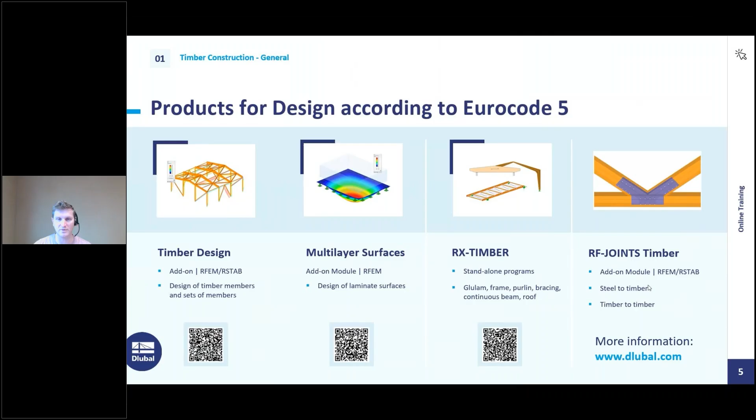We try to implement a new philosophy in RFEM 6, which is not available yet, but we are working on it. Okay, then we can switch over to RFEM 6 and start with our first example.

Okay, a few words about the presentation. I do not recommend modeling directly, but just watching and then repeating what was shown with the recording, which you will receive afterward in an email. This training actually requires the RFEM 6 student training. If you have not seen it yet, you can watch it later on our website. We will not go into the theory of timber design today - that would go beyond the time frame, and I will leave that to your professors.

Okay, then you see the new model base data dialog. That means we will enter a model name, in this case example 1. We choose the type of model. You can select the 3D type for this example or the 2D XZ plane stress type, which would also work. I'm used to keeping it as 3D, so that's why I select 3D.

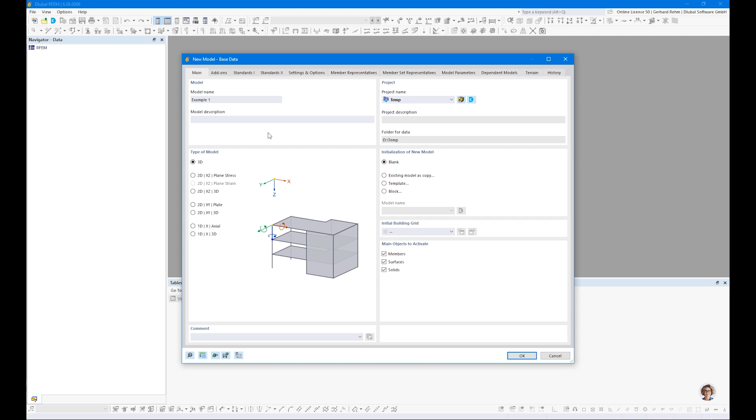Okay, then we go to the add-on tab. Here we can activate the Timber Design add-on. Here on the bottom you will see the Multi-layer Surfaces add-on, which was presented here. Okay, we do not need any load wizard, so I deactivated this option. For wind and snow loads, we don't want to generate it.

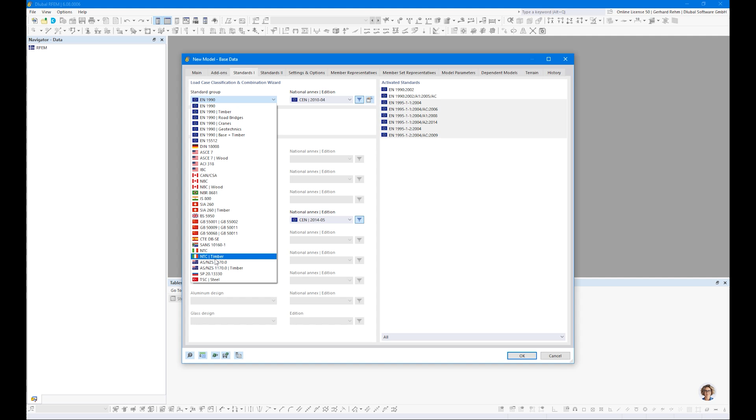Okay, the standard group should be changed to the timber-related standard group in this case, to consider the correct serviceability limit state load combinations. As you know, we talk about load duration classes, so that's why we need to always select the additional timber standard group for European standards or US standard, Canadian standard, Italian standard, Australian standard, exactly.

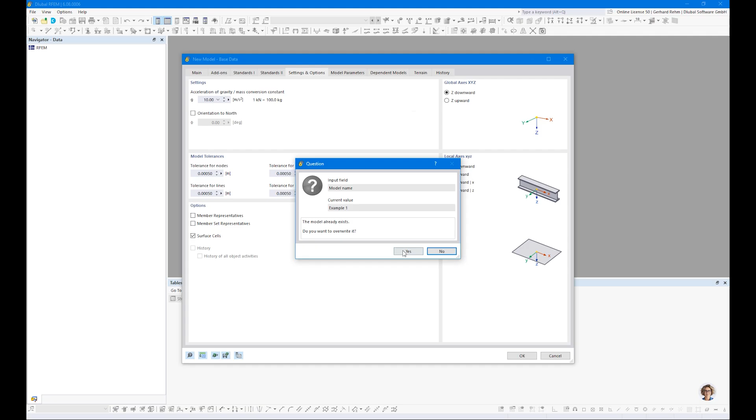Okay, so in this presentation I will use the global Eurocode, that's why I do not select any national annex here. Okay, so maybe we can deactivate the member representatives because we model only a few members, that's why we do not need it. Okay, then let's start.

Okay, so you know about all the navigators and the icons, I guess, from the RFEM 6 student training, that's why I will not mention any further things about that. We start creating a new member. I use this icon here on top.

And each member needs a cross-section, so I will create a new cross-section. Maybe before I start, I will delete out all data to start exactly from scratch. So a new member, and we will load a new section from the library.

All these Massive I sections can be designed according to Eurocode, and also according to SIA and the NTC. The composite sections, Massive II, is in progress, so it's not available yet in RFEM 6, since we introduce a new philosophy to design composite sections, because we do not want to use the gamma method described in Eurocode 5, which is really limited in its usage. We will use a different approach here, and we are working on it.

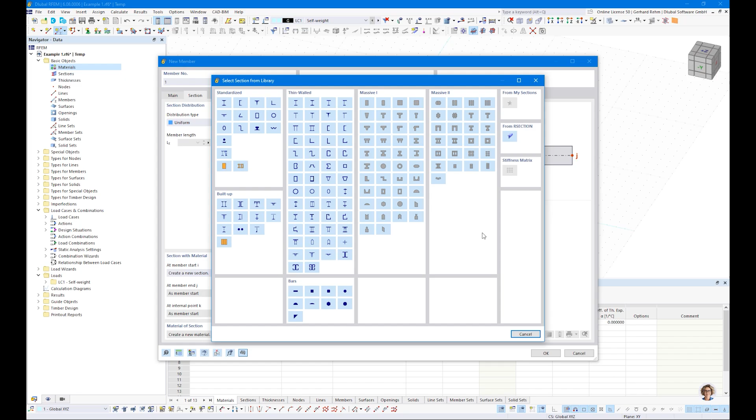So mostly we use our rectangular section. We need a material. We open the material library, and we can use these filters to find the correct material, or we can simply use the search. In this case, I want to use C24 according to European standard. That's why I enter C24 space EN, and I will get directly the material I'm looking for.

Okay, then let's go to the geometry. In this case, the width is 120 millimeters and the height is 200 millimeters. If you're interested, you can also check here the section properties.

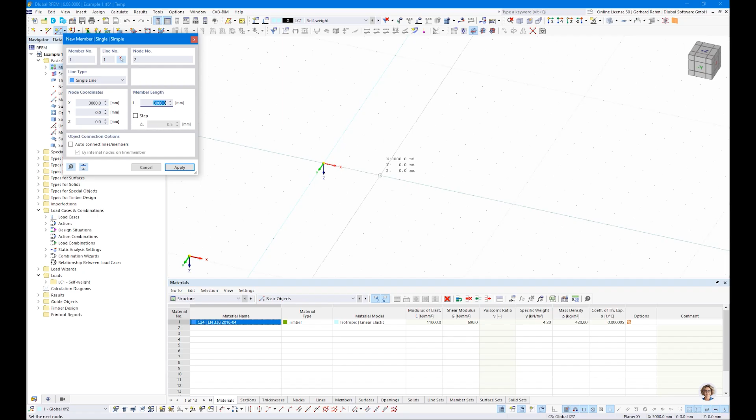Okay, so now the beam is on the cursor. We can start, for example, here in the origin and use these black grid points. I see the unit is still in millimeter. We can change this. So I go to 3 meters, and the next one should be at 4,500 millimeters, so the second span. In this case, we simply enter 4,500 millimeters and click the enter button, and that's it.

Maybe let's switch the units. I've changed it in a previous file, that's why it's set to millimeters. I want to use meters here.

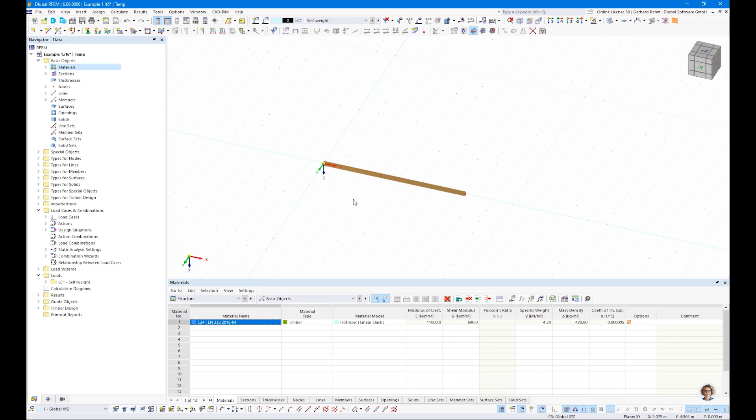Okay, so this is our rendered two-span beam. Of course, if you want to check the wireframe model, simply switch to wireframe. So this is actually what we use for our analysis.

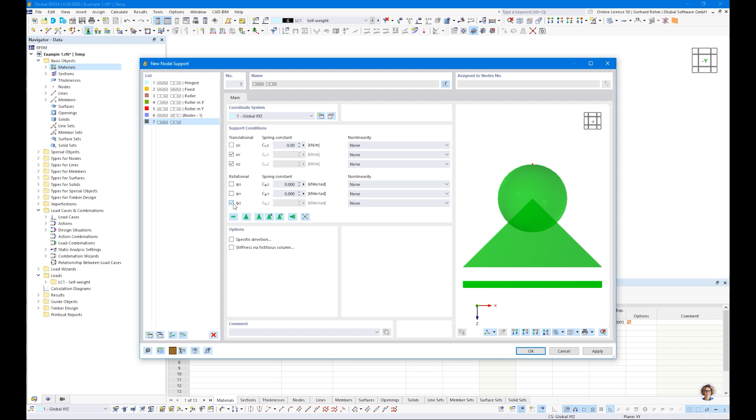So we have this two-span beam here, with the beams. Now we add some supports. We will use a fixed hinge support on the left side, and we will use a sliding support at the intermediate support. I create a new support which is sliding in X, and I will apply them on node number 2 and 3.

Okay, so that's it actually. We have already load case 1, which is created as default. So let's check load case 1. This load case 1 considers automatically the self-weight of the beam with factor 1.0. In case you want to calculate some examples from university, mostly they do not calculate the self-weight separately, they add it into the member load directly. So in this case, you can simply deactivate this checkbox. Here you see directly that this load case 1 self-weight is assigned to the action category permanent, that's why we use a load duration permanent here.

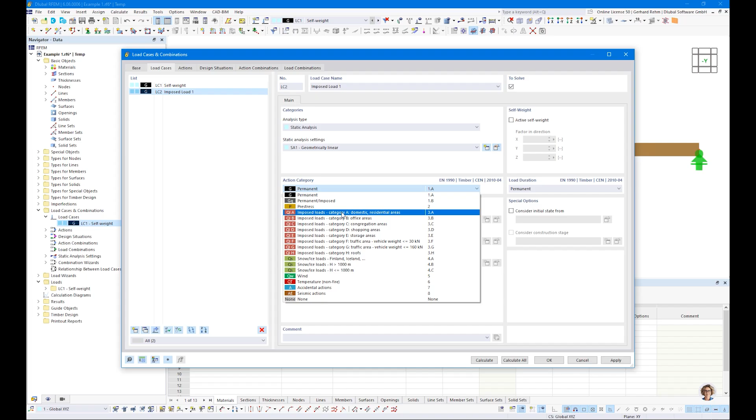Okay, we create another load case. In this case it's imposed load 1 on span 1. Action category we will change to imposed loads category A in this case, and you will see that the load duration is changed accordingly. I will create a copy of this load case and change here from span 1 to span 2. That's only a description, you can use whatever you want.

Then let's fill our load cases with loads. In this example, I will add a new member load. So watch out, do not use the line load for members, this will not work, you need to use the member load. Of course, you can also add some nodal loads too, but for our case we use the member loads. Okay, and we will apply a member load, in this case of 2.5 kilonewton per meter. Hit or click the member 1 and 2 and click OK, and then you will see that the load is created.

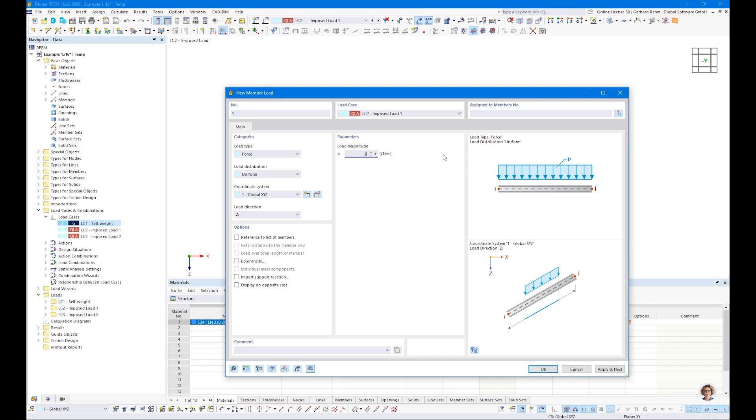Okay, then let's switch over to the imposed load. In this case, we will use 3 kilonewton per meter on the left span, and also in load case 3 on the right span. So we need to check the imposed load separately. We cannot use one load case in this case, because of course the imposed load is a variable load which can act on left, on right, or both at the same time. So for example, the biggest deflection we will receive from load case 3 in this case, but the biggest bending moment we will get from load case 2 and 3.

So when we check our load combinations, maybe we should go to the load cases and combination dialog and go through this dialog first. Okay, so we have created our load cases, then we will see what happens to our actions, especially important here for the imposed loads. When we check it, okay, both load cases can act simultaneously.

In case we switch over to alternatively, both load cases will not be combined. But of course, we want to consider all of them at the same time, meaning simultaneously.

Let's switch over to design situations. Here we can define which design situation we want to check. Of course, we want to check ULS, meaning permanent and transient, and we want to check the characteristic deformation and the quasi-permanent deformation. It depends on the national annex.

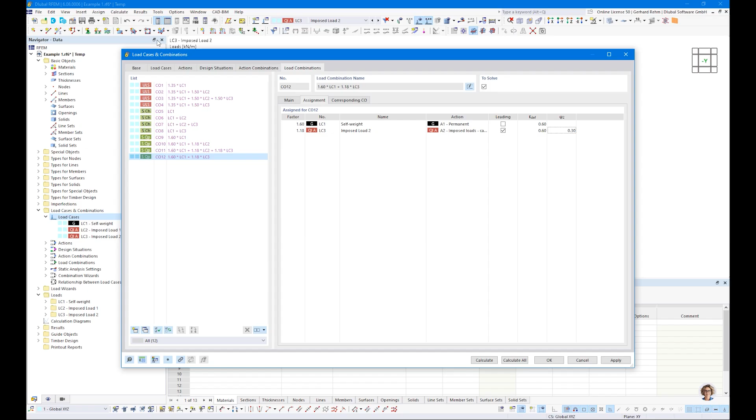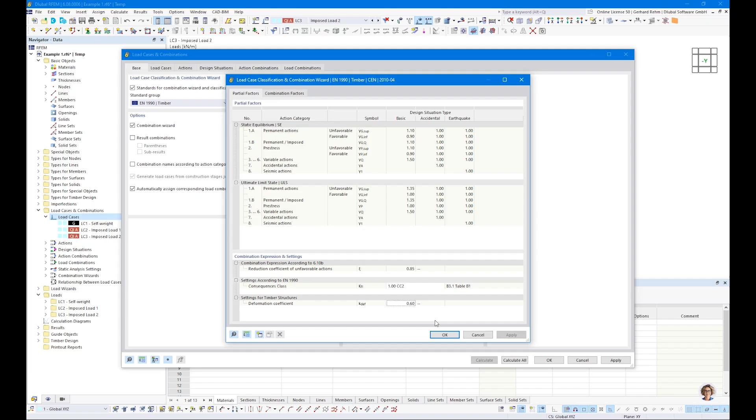The kdef value is described here in this load case classification dialog, and here on the bottom you see which kdef value is used as default, 0.6. This is, I guess, the case for most national annexes for softwood. Of course, if you have different service classes or different kdef values, you can enter or change the values here for this simplified method to consider creep.

So that's it actually so far. What we can do now is calculate the load cases and load combinations. I do that for design situation 1. The design situations include all load combinations as an envelope, so we can check it here.

What we see in the beginning is the deformation, with the maximum and the minimum. That means, of course, the minimum deformation will come from that load only, from CO1. So when we check CO1... no, sorry, I guess it's from CO2 in this case, it's the 9.5 millimeter.

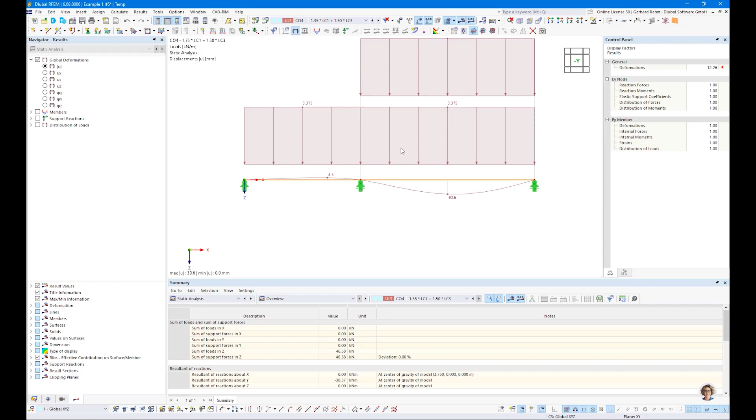And the maximum one should come from load combination 4, I guess. Yes, so load on the right span. Same for the bending moment, internal force My. The maximum bending moment, 15.55 kilonewton meter, will definitely come from load combination 3. And that's the case.

I don't want to go into detail because this was shown at the RFEM 6 training. You receive your deformation, the internal forces, and the support reactions, so I don't want to go into detail for now.

So what we do is focus on timber design today. That's why I switch over to the timber design add-on. Here I can define what I want to check. I will check ULS and both SLS checks, and of course, I want to design both beams.

So the question now is: do we want to design the beams separately, or design it as one beam, one element actually? To do so, we can create a member set. When we go to members, create member set, you see we can combine the different members into a member set.

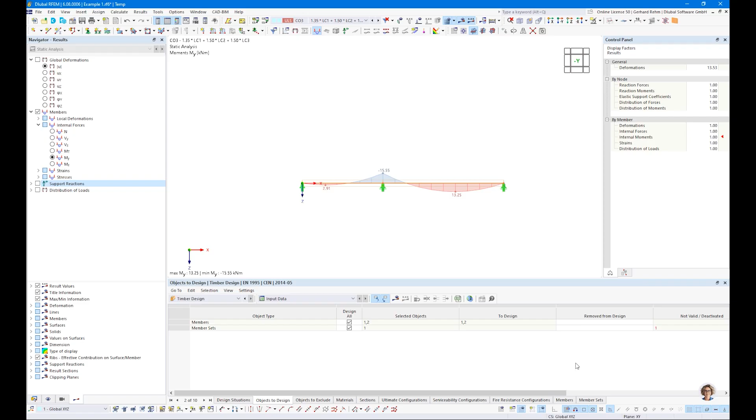That means we do not design 2 members, but we can design 1 member set. I click OK. When we check the member by right-click, member edit, or simply double-click the member, you see the design properties are now on the member, with some additional tabs here because of the design settings. But if we don't want to design any member, we simply create a member set and transfer the design properties to this member set. When we click OK now and go back to the members, you see this member has lost its design property because it's assigned to the member set.

Okay, so let's go back to the member set.

Here we can define some additional settings. For example, we can define which service class should be used, some local section reductions, and effective lengths in this example for buckling. But since floor beams are mostly never forced to fail for stability, we do not check stability for this example. We will check stability in examples 2 and 3.

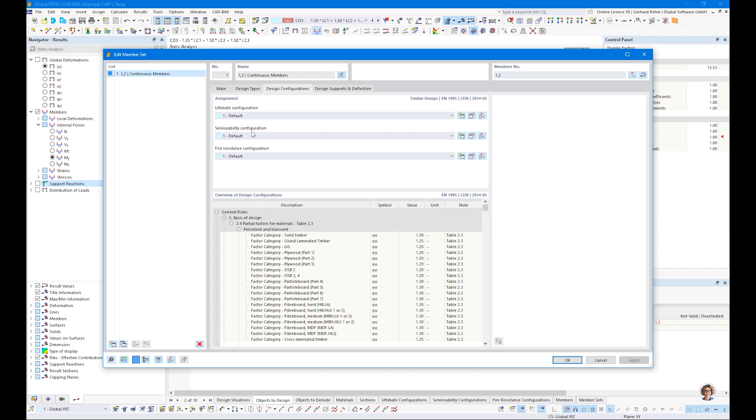Okay, so let's go to the design configurations. Each element, member or member set, has assigned a ULS, an SLS, and a fire config. We focus on ULS and SLS design checks for today. Let's check the default setting for the ULS config.

When we check it, there is, for example, this option, perform stability design, yes or no. In this example, I do not want to get informed that I miss some input for stability, that's why I deactivate this setting. There are some further settings for members and for surfaces, and also some standard parameters which I don't want to mention today in detail.

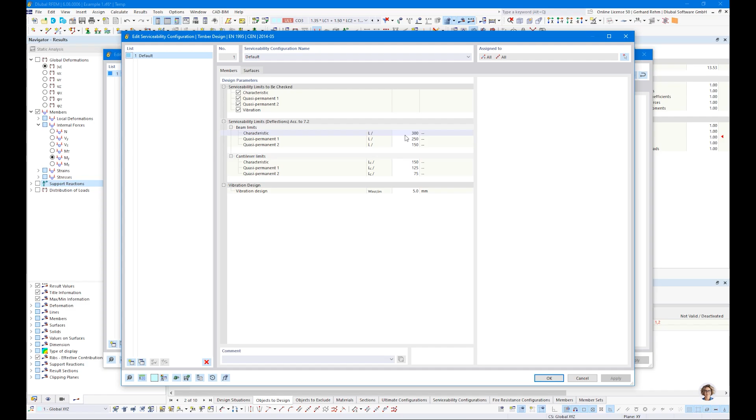When we check the SLS config, we will see our limits from the standard. It's also dependent on the national annex, of course, but it depends on you actually, so you can define your limits manually. Okay, then let's go to the last tab. The last tab is about design supports and deflection.

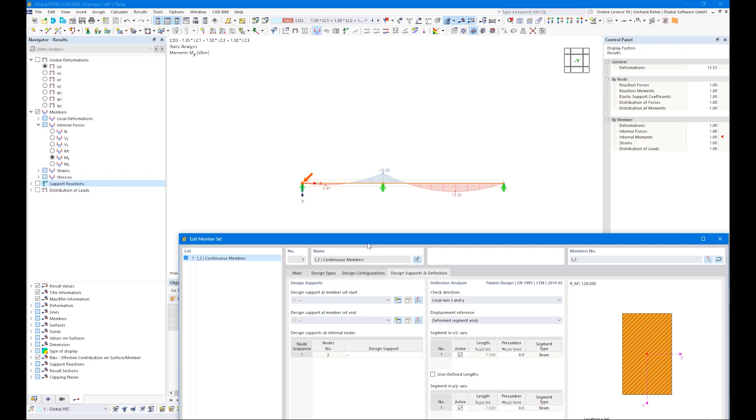Since we do not design the members individually, so member 1 and 2, but the member set, we will see that the reference length for the SLS design is used for 7.50 meters. That means if we left the setting as it is now, the program would check L over 300 by 7.50 meters over 300. This is of course not correct. So what we need is the segment, the first segment, and the second segment.

And how to consider this is by using design supports. This is a design support, so I will create one at member set start. This design support is for the design of pressure perpendicular to the grain, that's option 1, and for option 2, to create the segments for the serviceability design checks. In this case, we want to consider the support in the local Z-axis.

So let's go back and check the local axis system of the member. I right-click the member, local axis system of member. Each member has its own axis system, and in this case, we are focused on the Z-axis.

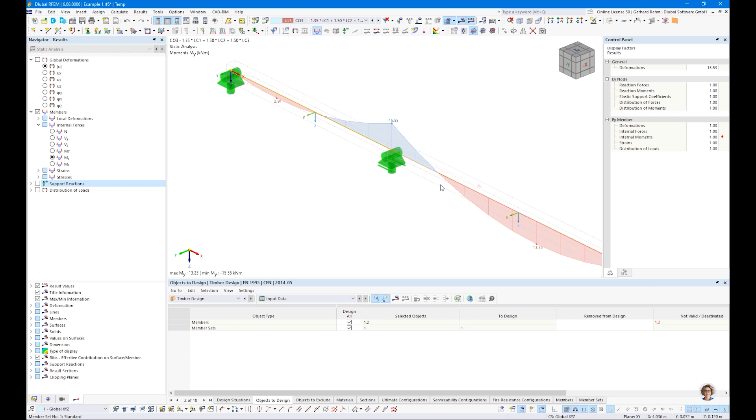Let's go back to this dialog, create a new design support. Support length should be 60 millimeters here. The width should be overtaken from the member, support width in plus Z direction. Of course, we can switch to minus Z direction too, but in this case the Z-axis goes downwards, and we want to apply the support at the bottom side. It's not an inner support, it's a support at the edge.

We could apply some shear force reduction, and we could also apply some reinforcement elements like fully threaded screws. For the compression design perpendicular to the grain, we need to introduce this KC90 factor. For softwood and discrete support, we use this factor 1.5, so this is a user input. We want to consider it for fire design - we don't do any fire design today, but we can leave it on - and yes, we want to consider it for the deflection check.

So I assign this design support to the member start. You will see this icon here on the bottom, or the symbol, and also at member end. You will see the tables are still based on one segment, but now it automatically detects this intermediate node. What we will do is create a new design support here, length should be 140 millimeters, and in this case it's an inner support.

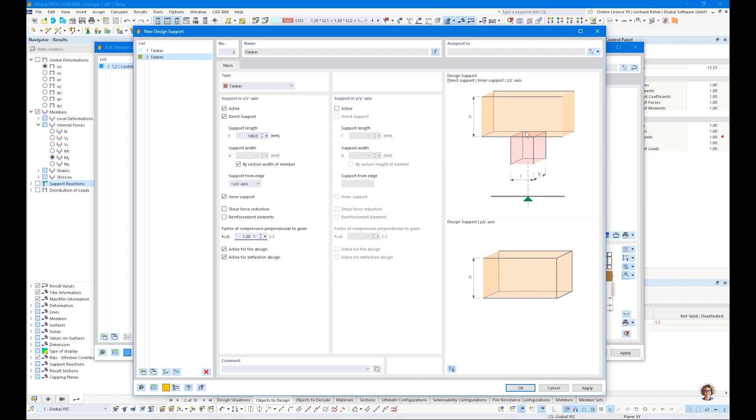This information is important because it needs to know if there is the additional 30 millimeters available for the support pressure design check on both sides or only on one side. Now you see the table has been changed, it detects two spans. One span is 3 meters, the other span 4 meters 50.

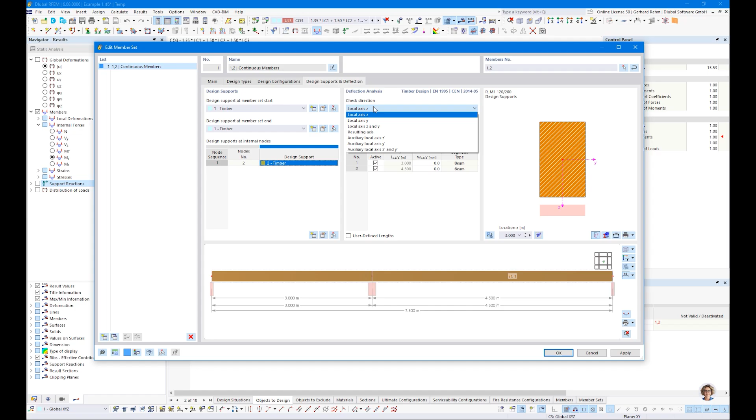We can switch to local Z-axis only because we have no deformation in the Y direction, but we can also leave it for Z and Y - it does not matter. Okay, so that's it for this tab.

Then let's go back to the design here on the bottom, for timber design input data. As you see, member 1 and 2 get invalid because we do not have any design properties on them anymore. That's why we deactivated them, and we want to check only member set 1. Okay, so that's it for the input, and we can simply start the analysis.

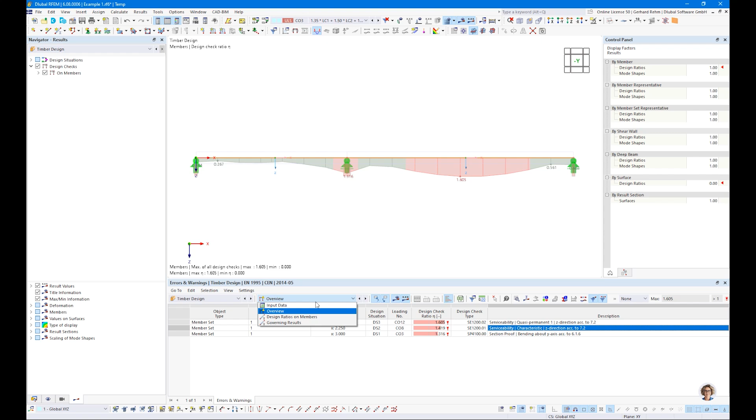So we can switch over to design ratios on members. And here we can see in detail what design checks are not fulfilled. So we have a few 0 values here. We can use this filter to show us everything which is higher than 0.

Okay, so shear is fulfilled. Sorry, not shear. The design of the support means the compression perpendicular to the grain is fulfilled. The shear is fulfilled, so we have no shear issue here, but bending is not fulfilled.

We can check this here in this table, or we can also check it graphically. We have different options. The first option is the default option, ratio envelope, which shows us the ratio envelope of all design values.

But we can also switch to selected design checks. In this case, maybe I want to deactivate serviceability. I want to see only the graphical representation of the ratio for ULS or only for SLS.

So here we can prove the plausibility. Yes, the ratio is affine to the deformation. That's fine so far.

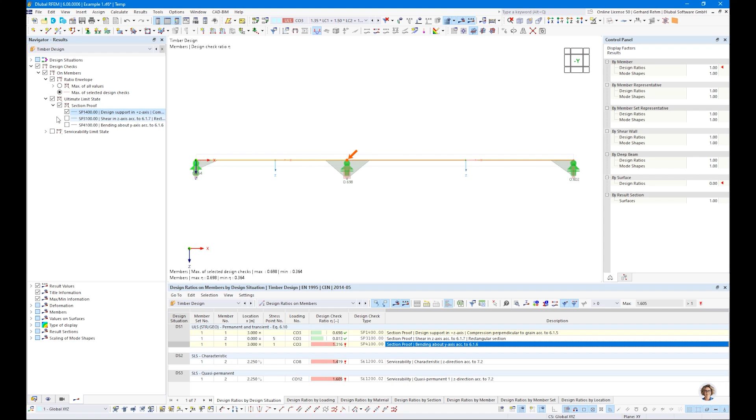Additionally, you can check the results for individual design checks. So for example, here, pure bending, pure shear, or pure design support. This helps you to better evaluate the results.

But let's go back to the table results and to the details. In case you are interested in how the design check is done, you can simply double click this design check and you will see what is done here. It's nothing special since we do not check any stability.

We will check the stability later, and then we will see that all equations are listed here. So we do not have a kind of black box like other software. You see each intermediate value, and you will be able to follow your hand calculations with that.

Okay, so in this case, nothing special. We have our K mod dependent on the load. In this case, it's CO3, which of course has included imposed load and load case 1, dead load. That means the K mod value for medium term is 0.8 multiplied by our 24 Newton per square millimeter, divided by the partial safety factor, and you will get the allowable stress. The stress divided by the allowable stress gives you the ratio.

That's actually all. But of course, what we can do now is we want to optimize this situation. There are two options to optimize it. You can simply add and change your cross section or your material manually here, or you can also optimize it.

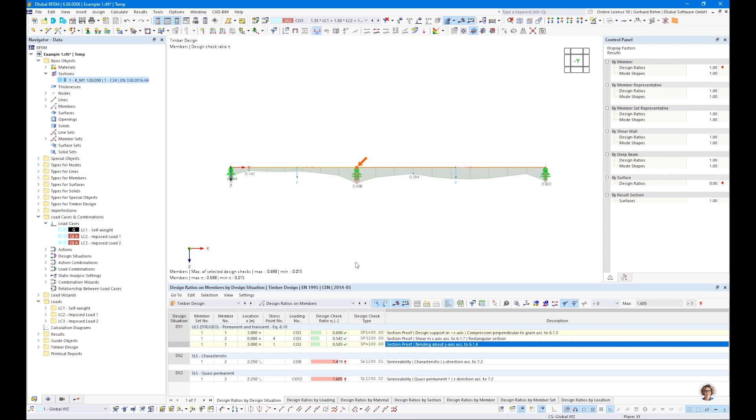Okay, so I'm wondering why we cannot use 120 by 280. It should also work. So I'm confused why it is not working. Let's do it manually and double check again.

Strange, it works with 280 as well. Let's try it again, maybe I have overseen something. Sorry for that. So we will optimize the height. We will start with 200 millimeter and go to 300 millimeter in steps of 20 millimeters.

So we have all the sections available for optimization. Now let's recalculate. Sorry, that was my problem. We need to calculate the timber design add-on again. Sorry for that, small mistake.

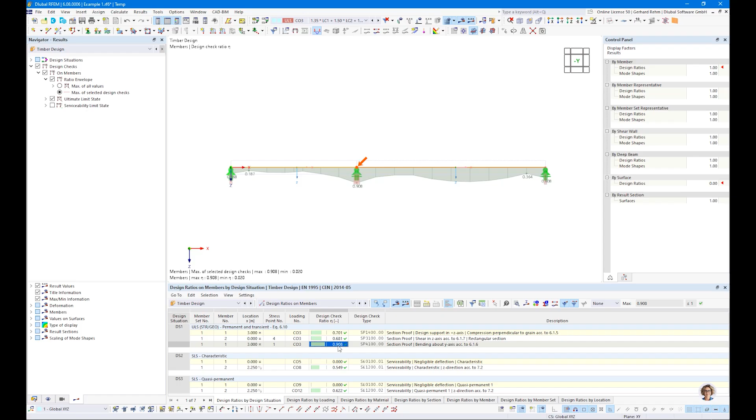Okay, now we see the maximum ratio is 0.9, and when we check the design ratio, when we check the input data again, then we will see 120 by 240 is used. Yeah, so that's fine, it works as expected.

Sorry, I forgot to calculate the results again. Yeah, when we add the serviceability design check, we have - sorry, this one was 200 millimeters default. Sorry again. All right, calculate timber design again.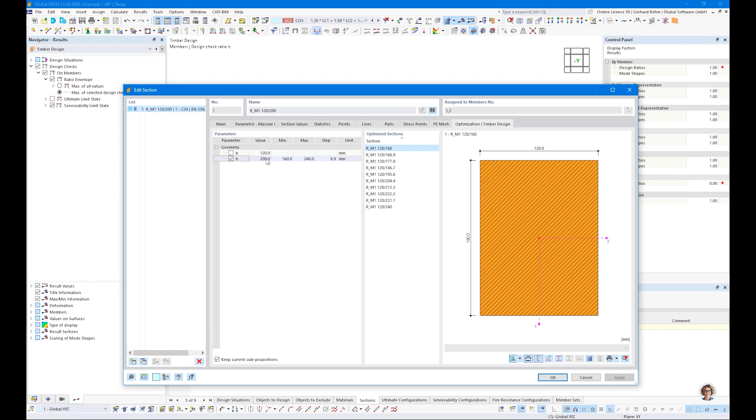Okay, so now we get the same result as before. We will see, okay, bending design check is not fulfilled. We can go back to input data and say, okay, optimize from current row, optimize the height. We start by 200 and the maximum should be 300 in 20 millimeter steps.

So that's it. Click OK, and then we can calculate the result again. Now we see that the design ratio is now fulfilled for ULS, but not for SLS. So what we need to do is we need to override this section. Simple right click, use all optimized sections in model. Then we will see the section will be overwritten, and when we check it again, then we will see the real deformation with the real cross section. So this process has to be done manually.

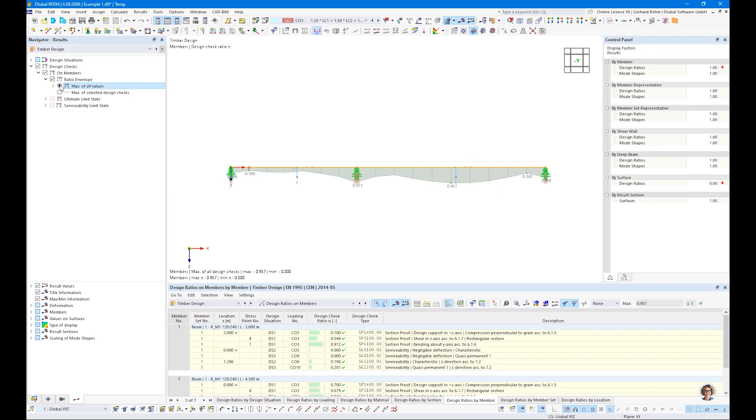Okay, so let's check max of all design checks. Perfect. Now we have optimized it to 95% ratio, which is fine. Okay, so this is our first example.

Let's switch back to our PowerPoint slides, and we will continue with our second example, the flexural buckling.

Okay, I will create a new file here. So in this case, model name is example 2. And add-ons, we will activate again the timber design add-on. We leave the standard, and we can deactivate the member representatives. Okay, I will not go in detail like in the first example.

So I will skip a few things, and I will not mention all settings what I will do. Or I will not describe in detail every setting what I will do. Okay, so let's switch again, standard group timber.

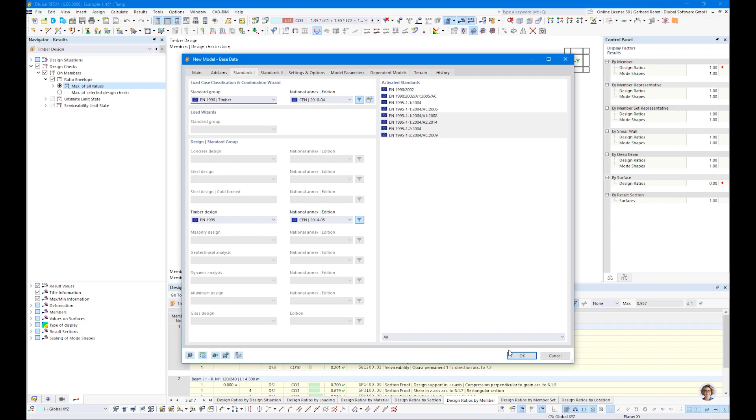And now we talk about buckling design. So that means when we consider or when we use a column, of course, this column normally becomes high normal force. And it can happen that it will happen that not the stress on the member is design giving or controlling, but this column can buckle out of the plane. Depends on the weak or strong axis, of course.

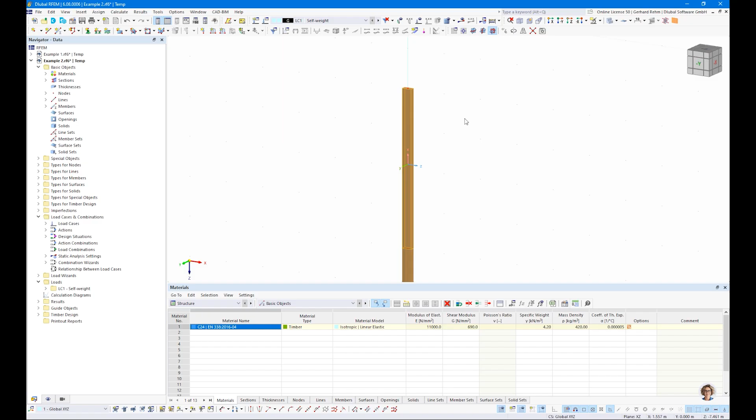So for this example, we will use a column with a length of 8 meters. Section 120 by 240, this is fine so far. So the length is 4 meters and 4 meters. We will have the weak axis, which is about Z axis, and the strong axis, which is about Y axis.

And about Y axis, about the strong axis, we will have no restraint considered, and about Z axis, we will have considered a restraint here in Y direction.

Okay, so we need some supports on the bottom. Oops, sorry. On the bottom. And a support on top, on column head. So we should consider the support like this, so that the normal force or the force can go into the beam.

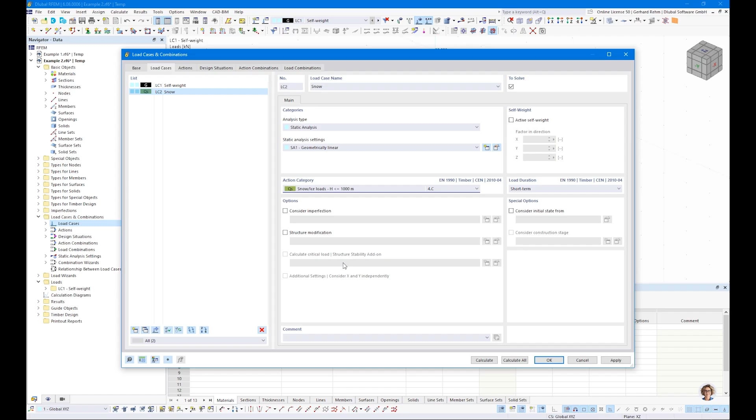Okay, here we go. So we will define some nodal load. I use the nodal load here, 35 kilonewton dead load. Okay, and let's create a new load case for snow load. Snow, and we will switch over to this category, smaller than 1000 meters, for example. It detects short term as load duration.

And when we check our load combinations, okay, let's go back to design situations. We do not want to check serviceability in this case, since we have only gravity loads. We consider only ULS. That means, dead load and dead load plus snow, according to, in this case, first order analysis is okay, since we do only an equivalent member design.

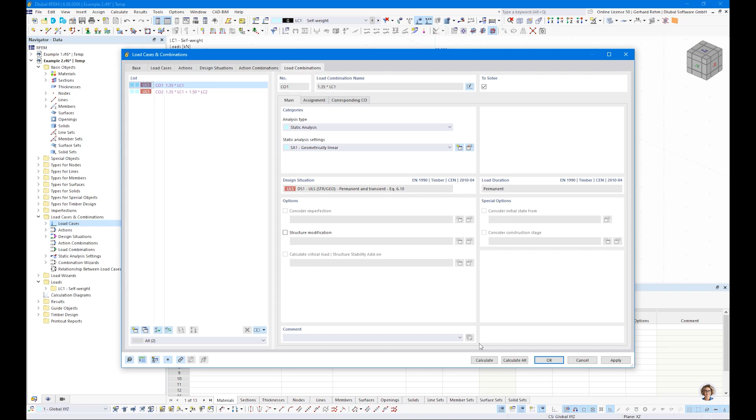So the Eurocode 5, for example, describes two methods, so the equivalent member design and an approach with second order analysis and imperfections, but we will not do this approach today. We focus on the equivalent member design.

Okay, that's actually it. We will fill load case 2 snow load, and we will apply 20 kilonewton of snow load here on top. I guess I don't have to say anything about the results. It's clear. When we check our design situation, we will get the envelope of load combination 1 and load combination 2.

So we are interested, of course, in the normal force. You see the top and bottom value differs a bit because of the self-weight of the beam.

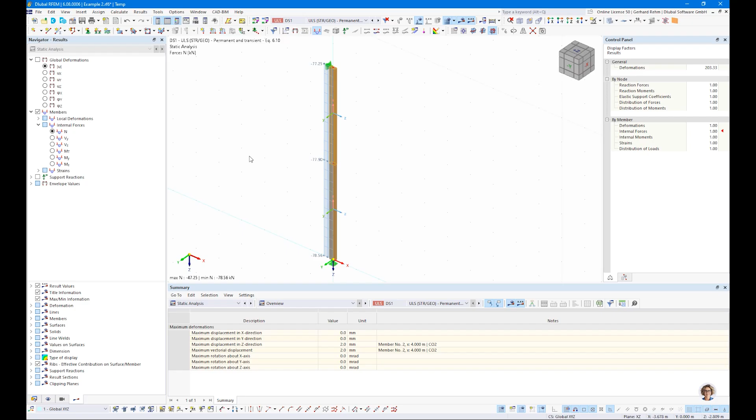So when we go to timber design now and click the calculate button, you will get informed that no effective lengths are assigned, and the stability design could not be performed. This is just a warning message. If you are fine with that, because you know this beam will not fail for buckling, then you can ignore it. But in our case, it's clear this slender beam will definitely buckle out of plane, so we need to consider this fact.

So when we check the results, we get only one design check, which is a pure section proof, meaning force divided by area divided by our strength. That's all, nothing special.

Okay, so what we want to do is a stability design check according to the equivalent member method. In this case, again, we will create a member set of two members and overtake the design properties again.

And here we define design types. In this case, we need effective lengths. In this tab, we say we want to check flexural buckling about the Y and Z axis. Lateral torsional buckling is not an issue here - that will be in example number 3.

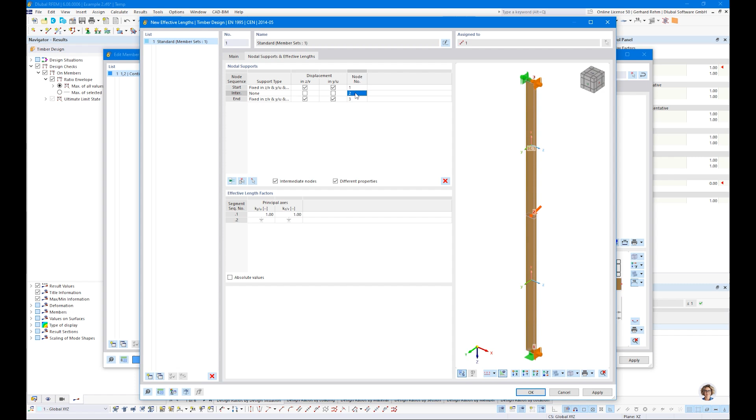So activate this checkbox and pick this member set, or simply insert this row. Node 2 is detected automatically, and yes, I have a restraint in Y direction. You see now these brown colored supports - they represent our restraints.

As you can see, for buckling about Y we still have one segment, and for buckling about Z axis we have 2 segments. Here you can see buckling length for the Y axis is 8 meters and for the Z axis is 2 times 4 meters. This is a simplification, on the safe side. In reality, the buckling length is a bit smaller since the turning points are next to the support somehow, but for practical usage this is fine and common in practice.

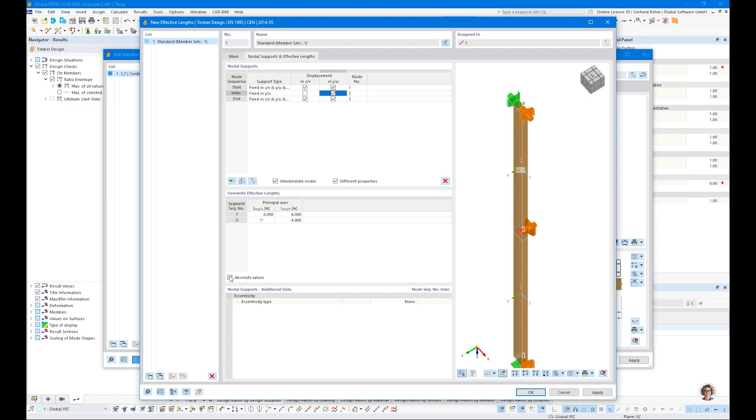Okay, so that's it, we can click OK and OK again. We can also activate this design support in RFEM directly, so we can check them here. Maybe it's worth deactivating the real nodal supports, so you see directly which effective length factor or length is used for the V, Y, or U axis. It helps you see how you have to find your bracing or lateral restraints.

Okay, so that's actually it. We can start the analysis again, and we will get this warning message again because I did not deactivate the members. I can ignore it, but I want to do it properly, that's why I deactivated. And then we'll see we get this cross-section design check.

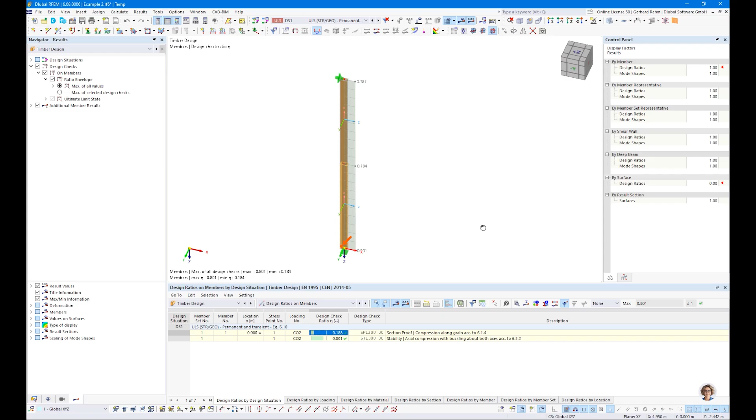And additionally, we get this buckling design check. So let's double check this buckling design check, because now we see all these equations from the standard. So first we start with the slenderness.

Based on the slenderness, we will get the ratio for the relative slenderness. And with the slenderness, according to the Eurocode, considering imperfections, we calculate this reduction factor Kc. So it's actually nothing else than reducing the cross-section section-proof design check by this Kc factor, in this case 0.23. That means when I multiply this ratio 0.801 by 0.23, I get exactly this ratio of 18% or 19%.

Okay, so you're able to follow each intermediate value, so you can compare it with the hand calculation. That should help a lot in proving the results. Okay, yeah, that's actually it for the buckling design check.

We can switch over to the next small example.

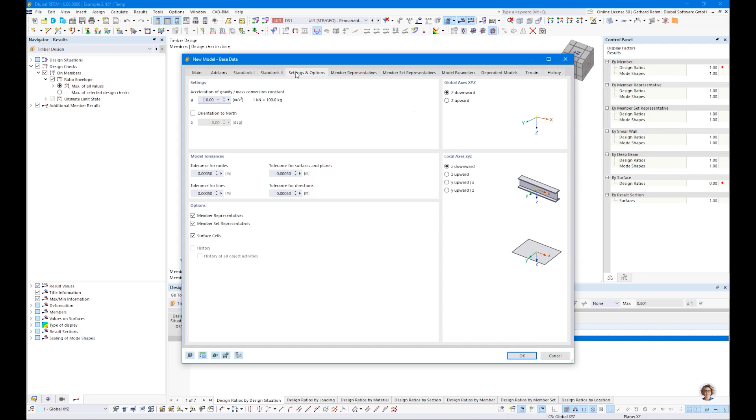Okay, new file, example 3. Timber standard - we do not need any representatives. Okay.

We start with a new cross-section, in this case 160 millimeters by 1600 millimeters. Of course, we cannot make this high beam with C24. We need to change the material to GL24h, for example, to a glulam material. Okay, that's it.

So the beam length should be 18 meters, like this. And we will have a fixed support on the left side, and then a sliding support on the right side. Of course, we could also use the fixed one here because we do not have any axial loads, so therefore it does not matter. We have no normal force here.

With the slider here, we can increase the size of the supports. We will check everything with that load, so we will not add any further load cases, since when you do timber design, the ratio is always dependent on the load duration class. In case of high self-weight and, for example, low snow, then snow is not controlling, but pure self-weight.

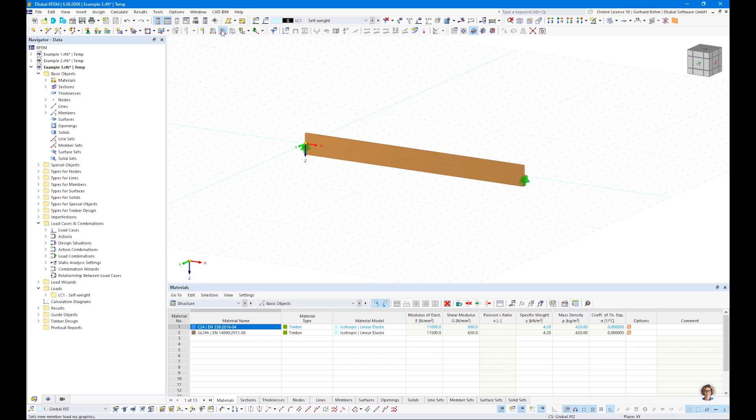So I will add a load here. For example, let's start with 8 kilonewton per meter on this girder, and let's see what's happening.

Of course, when we run the analysis now, we will get this warning message: you have not defined any effective lengths, so stability is not checked. And of course we want to check stability. When we check ULS and SLS, you will see the ULS design check, section proof is 63%. So actually it's good, but we need to know what is happening with this upper chord in this example. That's why we need to define an effective length here.

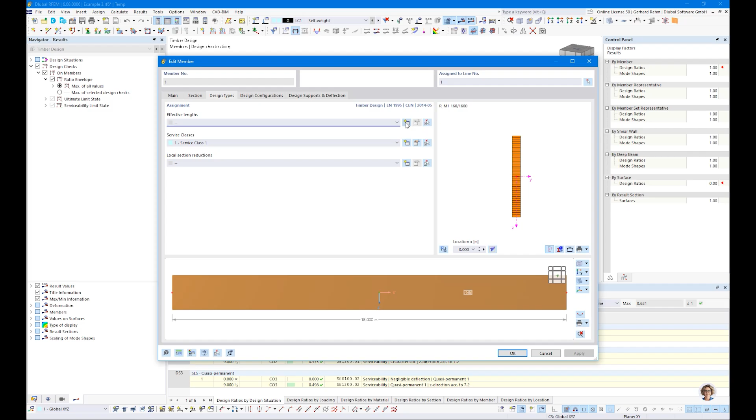We do not check flexural buckling - that's why I deactivated it. Since we have no normal force, you can also leave it activated. Here I want to check lateral torsional buckling. We have three options to check it, because for lateral torsional buckling we need to know what is the critical moment or the critical stress. Based on this critical stress, we can check the equivalent member method.

Let's start with the analytical equation to determine the critical bending moment or the critical stress. This comes from Eurocode chapter 6.3.3. But additionally, we have some eigenvalue solver included, which I will show you afterward, which helps you consider more options instead of settings described in the Eurocode, which is really limited to uniform loads, simple one-span beams, and so on. This eigenvalue solver helps you by not using these tables from Eurocode 5, and instead considers it in a common way to determine the critical bending moment.

In this case, we start with the analytical method. For the analytical method, we need to consider a buckling length factor according to Eurocode 5. We have this table in chapter 6.3.3. We have uniformly distributed load, that's why I select factor 0.9. So that means we have a buckling length of 18 meters multiplied by 0.9, equals 16.2 meters. Okay, that's it.

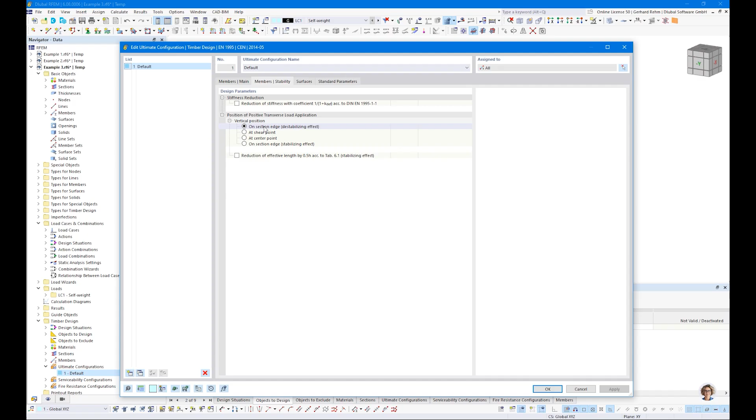Let's go to the ULS settings and to member stability. Here we can double check where we have applied the load. In this case, the load is applied on the top flange, on the top side, because of course it has an effect when the load is acting on the top side - it is more critical than when the load is applied on the shear center or maybe on the bottom side. In the equivalent member design method, we simply modify the buckling length with 2 times h, which is described in this table in chapter 6.3.3 in the Eurocode.

All right, we can start the calculation. And of course, you will see - maybe I will deactivate SLS, I'm not interested in SLS, that's why I delete this checks - and focus on ULS only.

And you see, okay, the design check is not fulfilled anymore. Let's double check the design check. So we see, okay, this is our allowable strength, and we see this equation which comes from the Eurocode to determine the critical stress. We have some factors here, some stiffness, the 5% quantile values for E modulus and shear modulus, torsional constant, and the buckling length.

So we have 18 meters beam length multiplied by 0.9, which was 16.2, plus, since the load is applied on the top side, plus 2 times 1.6 meters, equals 19.4 meters. We calculate again the slenderness, and due to the approach of the Eurocode, we will get this reduction factor. So we modify, or we multiply, our stress design check - in this case the 63 - we multiply by 0.24.

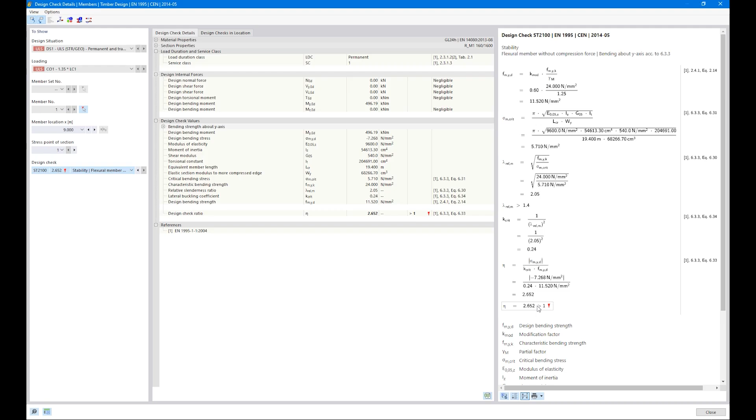In this case, we need to divide it. 0.63 divided by 0.24 equals 2.65. Yeah, and this is exactly what we get. So that means without any restraint, we will not get a fulfilled design check. And in this example, of course, you mostly never have an 18-meter long beam with no restraint. Normally there's some bracing here at the other sides and some beams added to this beam which support it. Yeah, and this effect we want to consider.

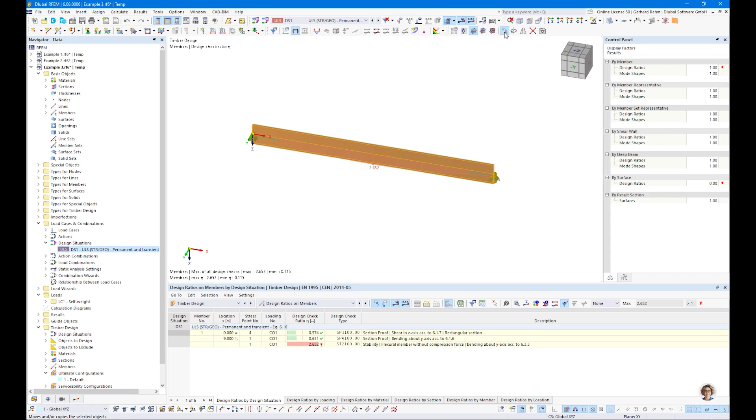Maybe we will do the same first with the eigenvalue solver. I can maybe directly create a copy, including the load. And for this beam, I will switch over to the eigenvalue solver. I create a new effective length where I check LTB by using the eigenvalue solver.

Okay, so now we have two beams. One beam is checked with the analytical approach. The second one is considered by the eigenvalue approach. Okay, let's check the results.

They should be quite similar, should not differ so much. So in this case, we have 2.46 compared to 2.65. The result is the effective length here, which was considered on the safe side. So normally the buckling length is a bit smaller, but Eurocode 5 uses simplifications. It's not exactly factor 0.9, but in reality it should be factor 0.885, for example. And also adding 2 times the beam height is not perfectly correct. That's why we have a different approach.

If you would use the German approach from the German annex, you would get a smaller buckling length, and then this one should be nearly, or should be the same.

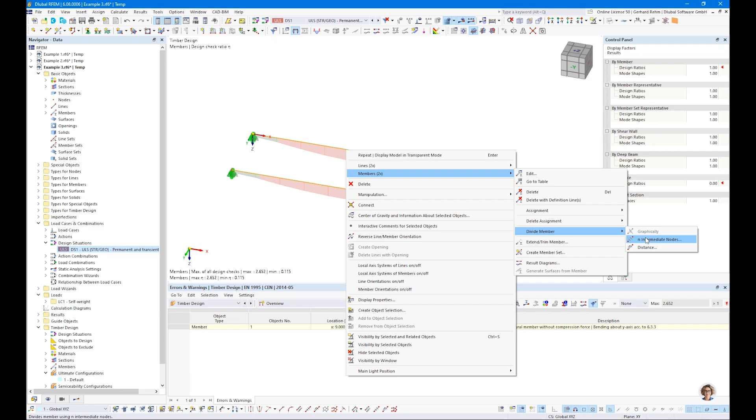Okay, we should solve the problem. And what I do is we will add some restraints here for the buckling method. So let's do it. For both cases, we divide the members and add some intermediate nodes. I will add 2 intermediate nodes, but I will not divide the member. I create a member on nodes. That's also possible, I do not have to always divide the members.

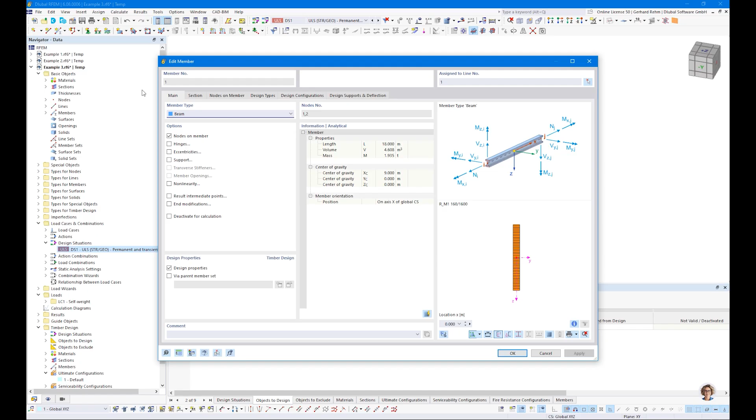So I have this node on members. When we double check it, it's not a standard node, but a node on member. And what I will do is I will modify the buckling length. So in this case, we want to consider intermediate nodes, restrained in Y direction, and all elements can be considered now with factor 1, since we have nearly a constant moment distribution in between the center of the beam. So that's why I use 1.0 here.

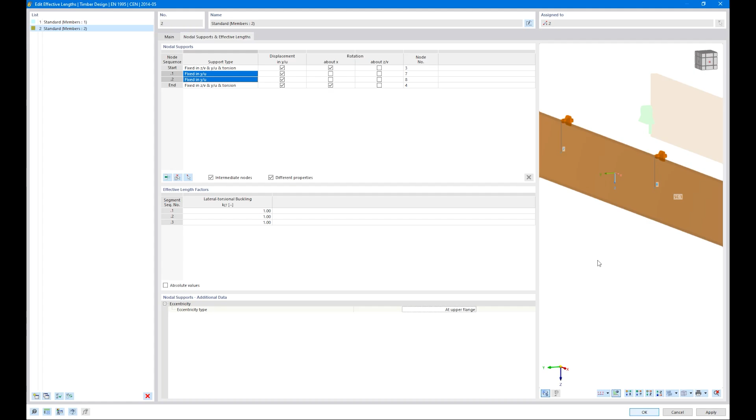This is also common in practice. And for that, of course, it's a simplification. It's not exact. A better result you will get with this eigenvalue solver. And here I do the same. I insert again these lateral restraints, and in this example the lateral restraints should be applied here on the top side. So maybe switch over to the real view. So we have these brown colored supports which act at the shear center at the moment, but we will change this to the upper flange, and this setting will be sent to our eigenvalue solver.

Yeah, okay, now let's compare the result again. Okay, and you will see that the eigenvalue solver shows us a result which is fine, but not the equivalent member design method by using this analytical equation. Yeah, this approach is too much on the safe side.

We should use smaller buckling lengths in this case. So let's double check it. So we have 9 meter 20 in this case. It's nothing else but dividing 18 by factor - we have 3 spans in this case - 6 plus 2 times 1.6 meters equals 9.2 meters.

So maybe this approach is not correct. The buckling length in reality is smaller. But we do not focus on this method. We focus on this eigenvalue solver method because it gives us better results.

Yeah, so let's check it. When we double click the design check, we do not see this equation to determine the critical stress analytically. We do it with this eigenvalue solver. And from the eigenvalue solver, we receive this alpha critical factor. Multiplied by the bending moment from this load combination, we will get our critical bending moment, and we can calculate our critical stress accordingly.

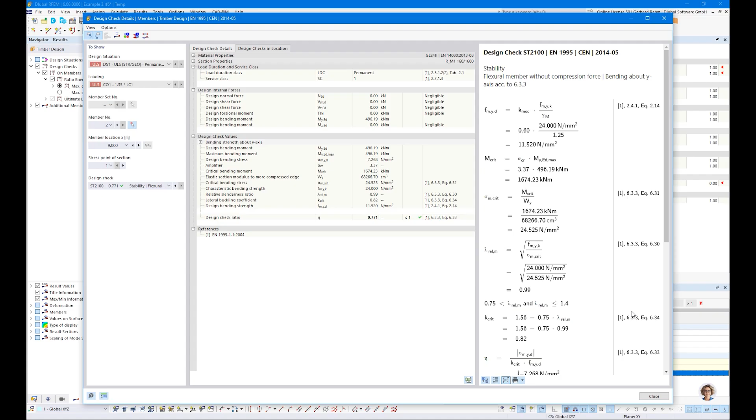Yeah, that's it so far. Maybe some additional info - you can see here these additional results, mode shapes. So when you see it, this is the mode shape which is considered.

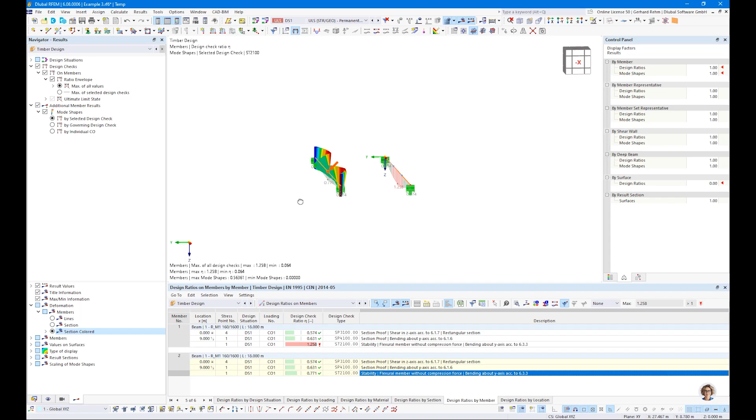Maybe we can switch over to the colored distribution, and here you can perfectly see how this upper flange is failing out of the plane. You see these areas here are restrained - we will have no deformations here at this location on the top chord.

This is, in my opinion, the best way to consider these buckling effects. Of course, if it's a one-span beam with simple restraints, the analytical equation gives good results as well and can be used. But in more complex systems, I recommend using this eigenvalue solver to detect the critical bending moment or stress.

Okay, that's it so far. We will switch over to our last example. So we are leaving the beam design and switching over to surface design.

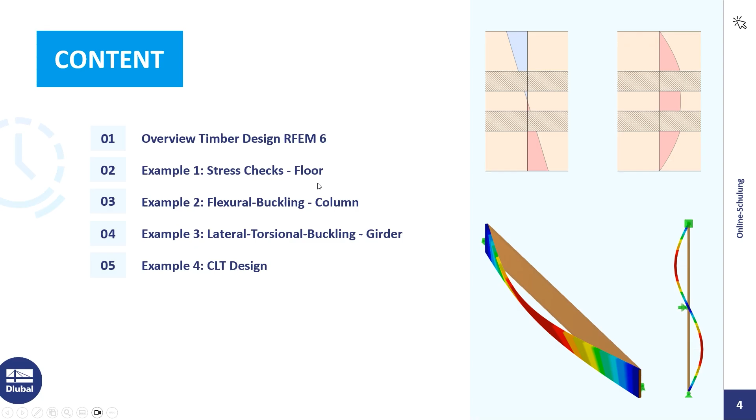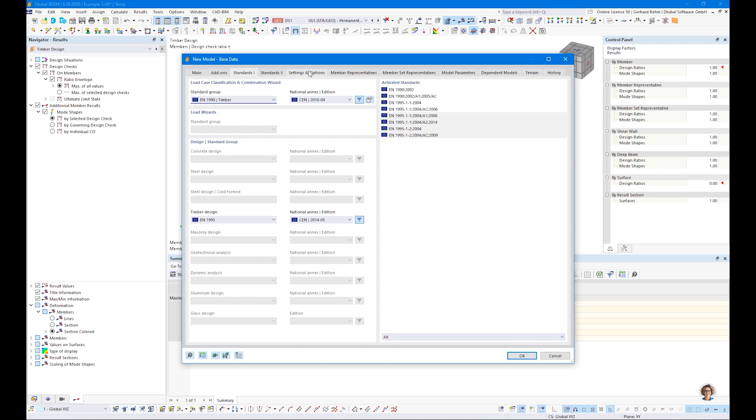Okay, again we need a new file. Example 4. Here for add-ons, we activate this multi-layer add-on, we activate timber design, we switch over to the timber standard, and that's it - we can create this file.

Now you should know that CLT design in RFEM is not based on member design, but on surface design. It brings you many advantages, such as individual shapes, and you can consider openings in the CLT panel and so on. Today we will do a simple CLT slab, 1 meter by 8 meters.

We create a new rectangular surface, and same like for members, we need a geometry. In this case, we need a thickness. We create a new thickness, and we will switch to layers.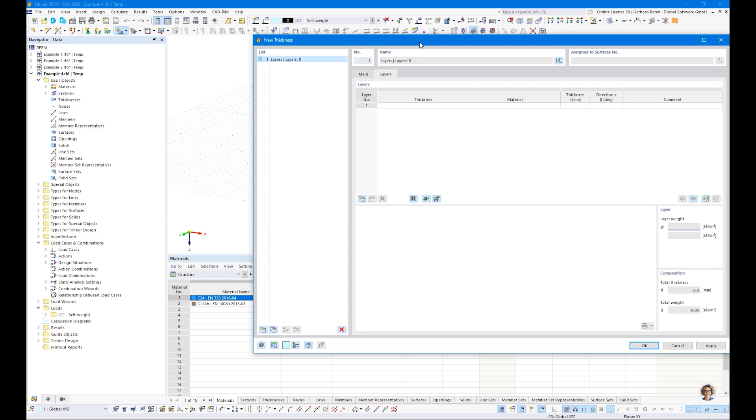Here we can define our composition manually from the material library, or we can simply load compositions from the producers. We have different countries or different producers from different countries implemented. In this case, I will use Binderholz producer, 140 millimeter 5-layered CLT panel.

When we overtake the settings, you will see the type comes from library, this is the material which is used, this is the thickness which is used, and this is the orthotropic direction which is used - meaning the first layer is oriented in 0-degree direction, the second layer in 90-degree direction, and so on.

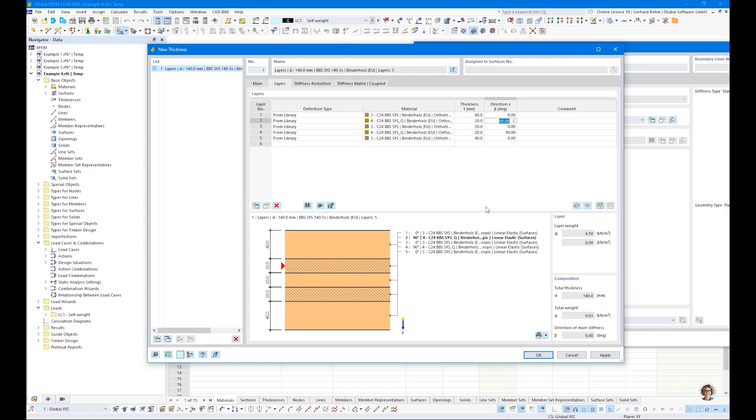Let's create a surface and check out the orientation - 1 by 8 meters, using the grid points. When we check the local axis system, you will see the 0-degree direction is oriented parallel to the local x-axis of the surface.

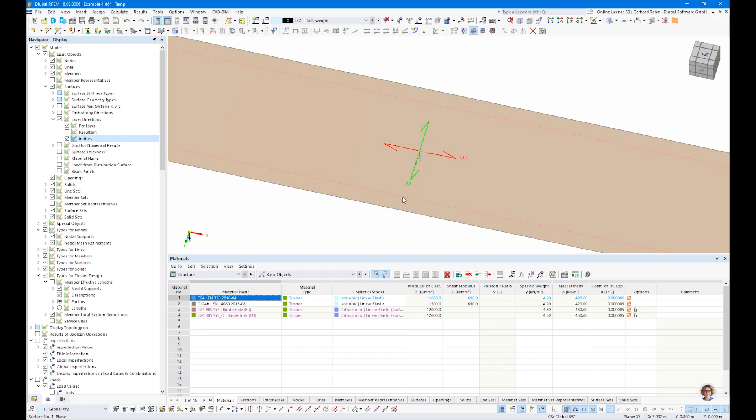We can also show the layers here at surfaces layer directions. For example, with indices, you will see layer 1, 3, 5 is oriented in this direction, layer 2 and 4 in this direction. Or, for example, as resultant - this gives you the span direction of the CLT.

But of course, if you would model the surface like this, in this case I don't want to consider the orientation like that. What you can do is create a new composition where you rotate the 0 and 90 degree direction - go inside here, create a copy, and change this to 90, 0, 90, 0, and so on. But I don't want to do it.

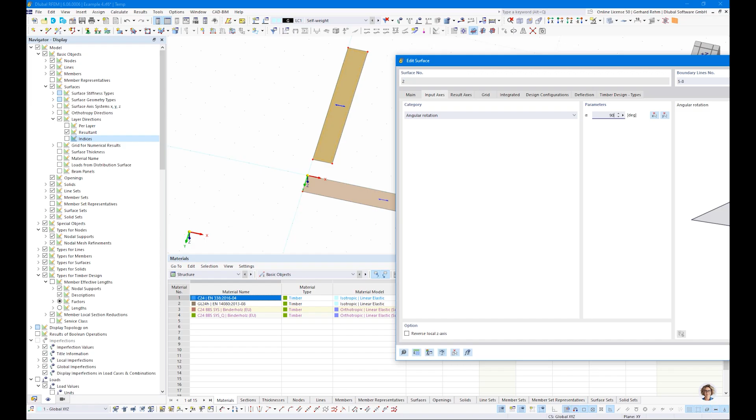It's much smarter to rotate the input axis of the surface by, for example, 90 degrees. All right, this is how you can control the orientation of your CLT.

Okay, I will add the supports to the structure. In this case, we use simple pin supports. Maybe we can reduce this to see - it's not a nodal support, it's a line support. It supports the whole line here.

Okay, and now we need to define loading. We need, again, load cases for the imposed load for this floor - imposed load category A, create a copy, for span 2. We will feed the load cases now by loads - we will consider 2.5 kilonewton per square meter for the self-weight.

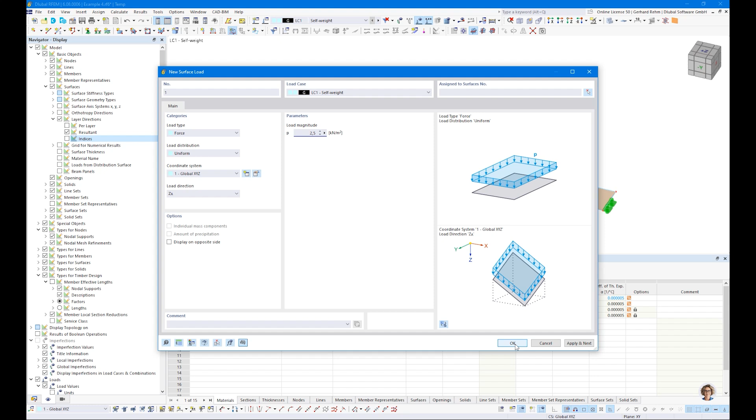And for the imposed load, yeah, we did not divide the surface here - we have one surface. So in this case, we cannot use the surface load, but we can use our free rectangular load. This free rectangular load is independent of the surface geometry, so we will apply this load here on surface 1.

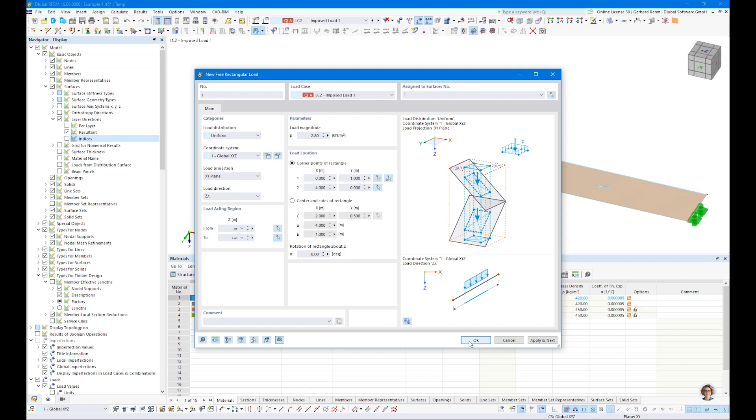Magnitude should be 2.8 kilonewton per square meter, and the area should be defined here by these 2 nodes. Now we see the load is applied only here on the left side, on the left span. We copy the load by Control C, insert the load by Control V, and we will get the load, and simply modify the load position.

Yeah, and that's it. When we talk about FEA, you should know about FE mesh, about meshing - something I cannot explain in detail today. When we create the FE mesh, you will see the default setting is 0.5 meter. This is the default setting.

In general, we recommend considering at least 3 elements over the width, up to 5, 6, 7, 8 elements. There is no common answer - it depends always on your geometry. That's why I will change this to 0.2 meters in this case.

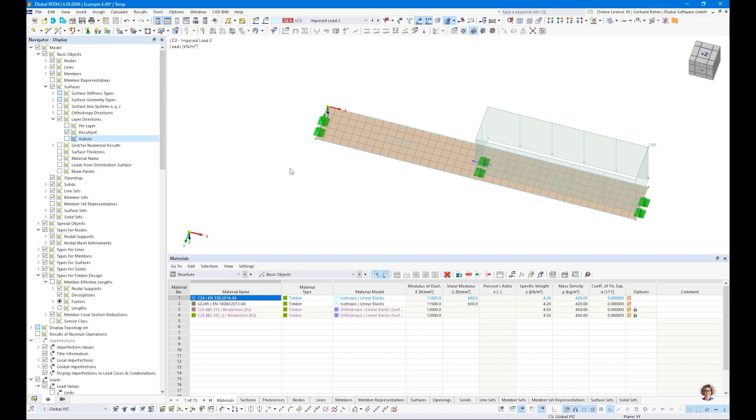Consider the fact that the finer the FE mesh, the longer the calculation takes. For bigger structures, please think about what FE mesh size you use. You can redefine locally as well, so it's not always about the global setting, but maybe simply refine only specific surfaces.

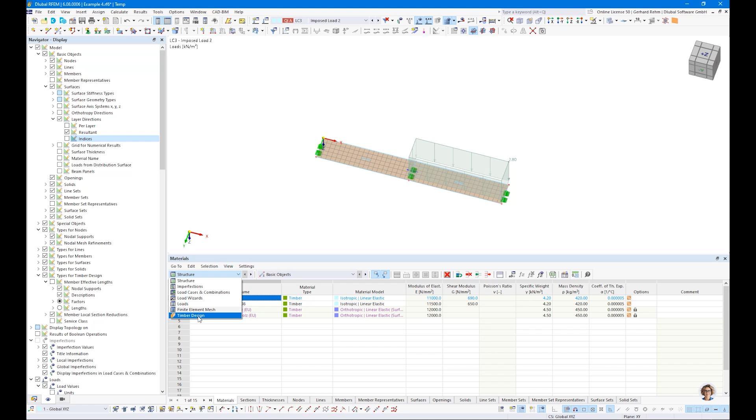Double click the surface, mesh refinement. You can activate it here and create a mesh refinement for specific surfaces, for specific lines, or for specific nodes. Okay, so that's it so far. Let's run the analysis.

Let's check the top view. You will see here there are some really small values we are not interested in. That's why I define a filter: define, enter 0.01, please show everything which is higher than 0.01. And what we see is we get shear in the YZ plane, which is our rolling shear.

We check our transversal shear in the XZ plane. We check the bending, and we check the deformation for characteristic and for quasi-permanent. Additionally, we can check it again here with our

ratio envelope. So if you're interested in the ratio envelope, keep the setting, and here you can define your own setting - maybe only ULS or only SLS, or only a specific design check, only a specific layer side, only a specific layer material. Or you can deactivate the ratio envelope, and then you have only these checkboxes where you can check only one result.

Okay, I'm not interested in this. I'm interested in the ratio envelope here. Let's check a design check. Double click the design check and you will see what's happening.

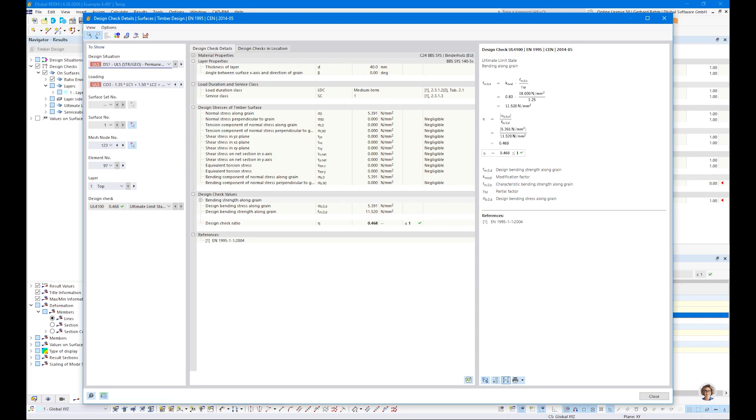Nothing special. We receive the stresses directly from the solver, so they are not calculated by some analytical equations. They come directly from our solver, and we compare our stresses from each layer side to the limit stress. Nothing special.

To check the results, you can either check the stresses directly in RFEM by switching to the static analysis. Here you can, for example, say okay, I want to consider layer side top, and let's check, for example, the elastic stress component bending on top side, and you will see the stress component: 5.4 Newton per square millimeters.

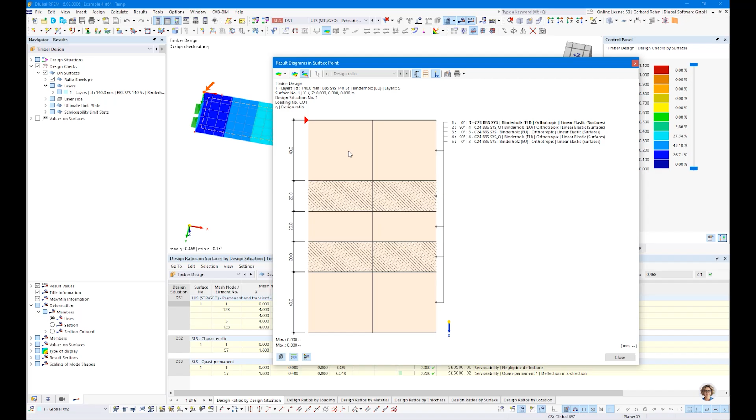There's also this other option in the add-on. You can open this result dialog where you can simply switch to design ratio. Okay, the design ratio here is extremely small. Maybe it's worth going to this location where you can see the design ratio over the layers, or maybe the

stresses. Again, here you can see the stress on the transversal layers or on the longitudinal layers. Since the transversal layers have no stiffness in the y direction, of course, they cannot cover any stress for bending, or for shear. That's the typical shear stress distribution for CLT, and also tau YZ, which is our rolling shear stress.

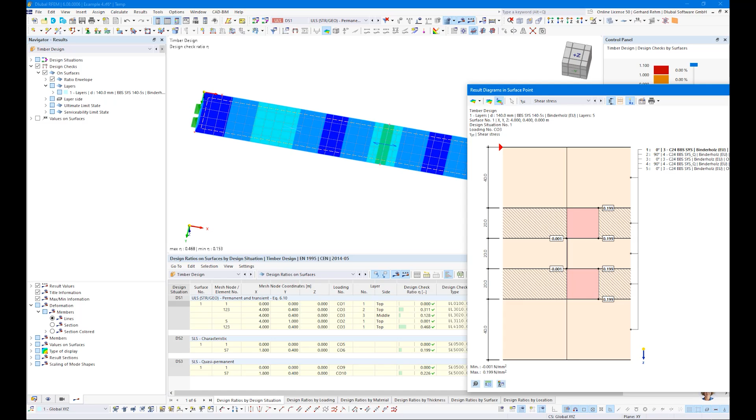Okay, so this is how you can evaluate the results for CLT. Of course, there would be much more to say, but time is running really quick already, and the hour is already over.